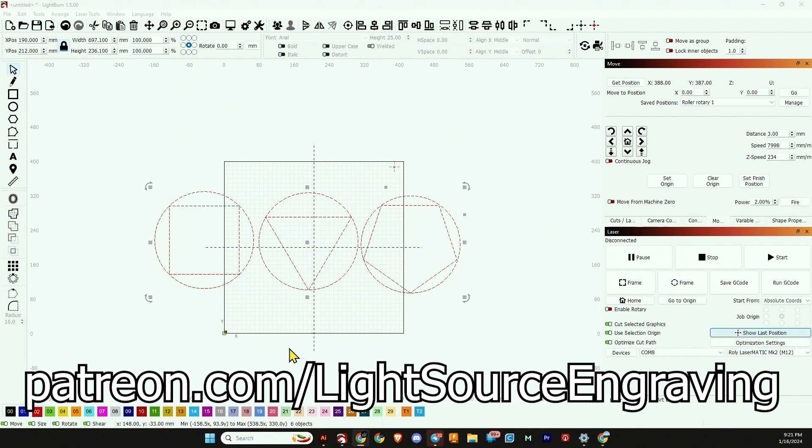So here I have examples of 3 objects, and then I have circles around them. So you can see this is how the objects are described as circular, that the points around them form a circle.

So if you have an object similar to these shapes, then you can use the circle center finder tool - that's a mouthful - to find the center of your object.

What you're going to do is control your laser head from either the control panel on a Ruida controller or with a diode like I have here. We're going to be using the move tab to jog the laser head around.

Another thing we'll be doing is changing the distance. So if it was 3 millimeters and we have a 100 millimeter circle, we're going to have to click that button 33 times to get through that 100 millimeter circle. So if we change it to 10, then we only have to click it 10 times. So that's what we're going to do, we're going to adjust that distance.

And speed, I'm just going to leave it the same, but I'll be adjusting the distance. Then once we get close to the edge, we want to drop that distance back down so we have precision to line it up with the exact edge of our object.

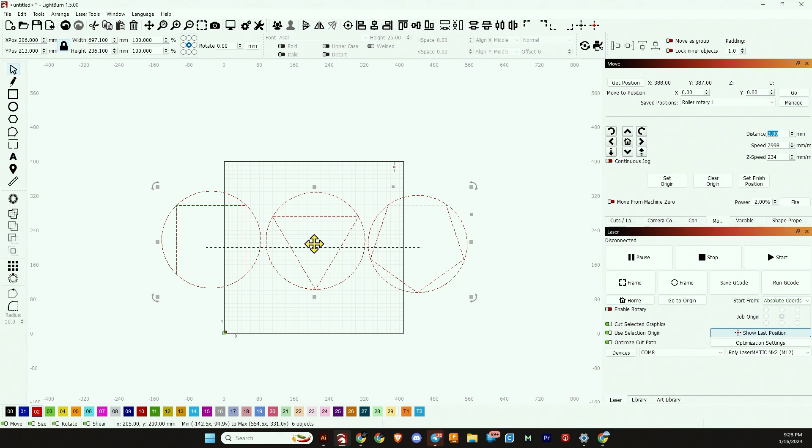And I have these objects cut out, and I'll show you how to find the center of them on the diode.

The first thing we have to do is turn it on. The second thing we have to do is home the machine. Now mine is on and it just homed itself, but I'll do it again.

All right, so now we are home and we're going to go ahead and fire the laser, and then we're going to use these move tabs. I'm going to change it to 10. Then I'm just going to start jogging it to the outside position on this circle.

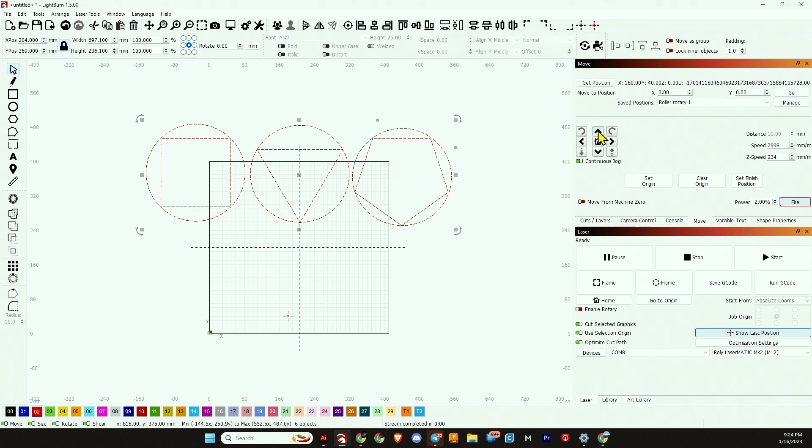And if you want to have it move continuously without having to click the buttons, you can turn on continuous jog. I'll show you what that does - you hold the arrow down, and what that does is allows your laser to continuously move without you having to click the buttons. That can get you from point to point a little bit quicker.

Then when you want to line it up for accuracy, you want to turn that continuous jog off. So now I'm going to set it to 1 millimeter, and what I'm doing is just moving the laser head 1 millimeter at a time, and you can see that I'm just on the side with that beam.

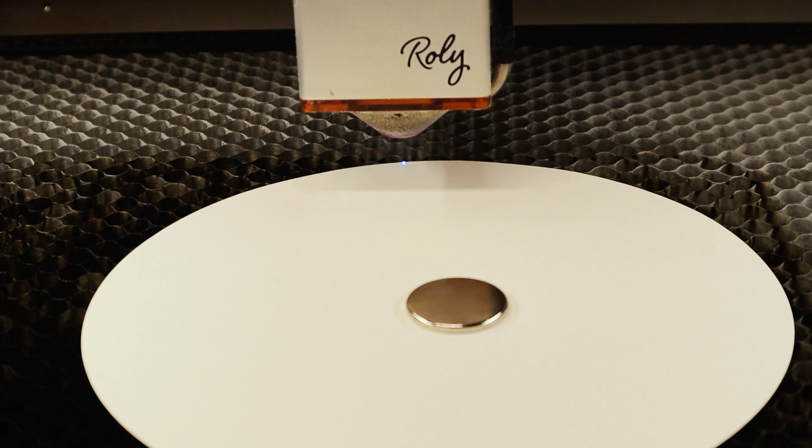So we're going to go back to our center finder tool and start it up. So laser tools - it's over here, it's in the laser tools menu. For some reason it brought it off onto my other screen.

All right, so now that we've jogged it to our first point, we're going to go ahead and click set first circle point. And it's telling you right here is where our first one is. So you want to spread your points out as much as possible - move it into this vicinity somewhere, and then the third one will move into the vicinity over here.

So let's go ahead and set the second one. I'm going to turn on continuous jog and just move it to the center like that, and then over to the side. You'll see how over at the edge you really got to turn that down - turn continuous jog off, it's set at 1 millimeter.

And depending on your laser pointer, your red dot or your diode, you could even try to split the dot in half on the side of your material to try to get it as accurate as possible. So we're going to set that as the second point.

And then I'm going to go continuous jog on, I'm going to go over to this side, and now we'll set the third and final point.

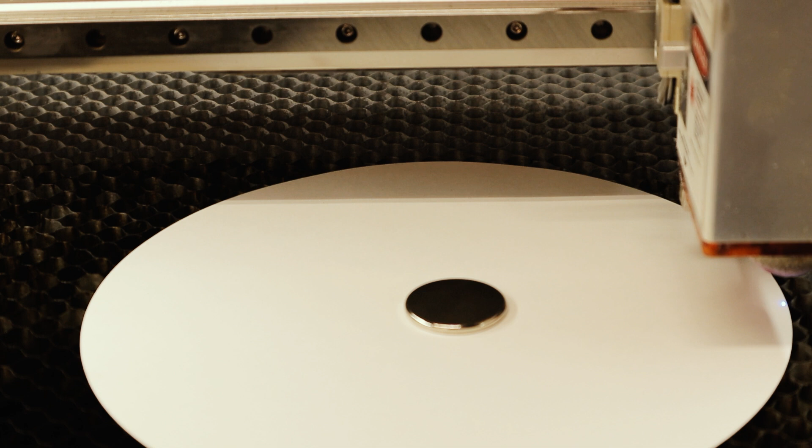And then there's our third point. So click set third circle point. Let me bring it back over to LightBurn here. And when we click it, it gives us the option to jog to the center and add a guide to the project. So I'm going to add the guide, and jog to the center so we can see exactly where this laser head ends up. And there we are, right in the center of the circle that I have down.

I'm just holding that down with a magnet so the laser doesn't blow that piece of paper away. Then when we come back to LightBurn and hit the OK button, right here you'll see our template for that circle. And right there it's showing us where the laser head position is, which is exactly in the center of our circle.

Now, if you want to work in absolute coordinates, you can most certainly do that and move your artwork right here to the center. Or you could even set the origin of your work at this point and then use the user origin option. So you have either of those options available to you.

Now I'm going to run through the same process and show you that it does work on a triangle. Let's do the triangle next. So I'm going to just delete this because we don't need it. We're going to be using a different object.

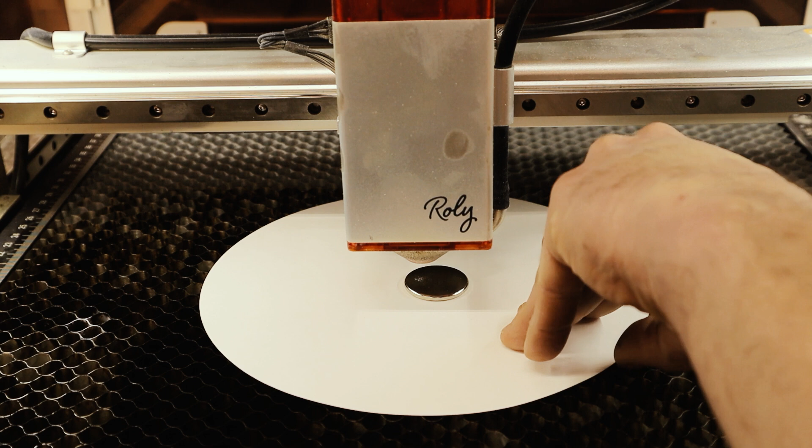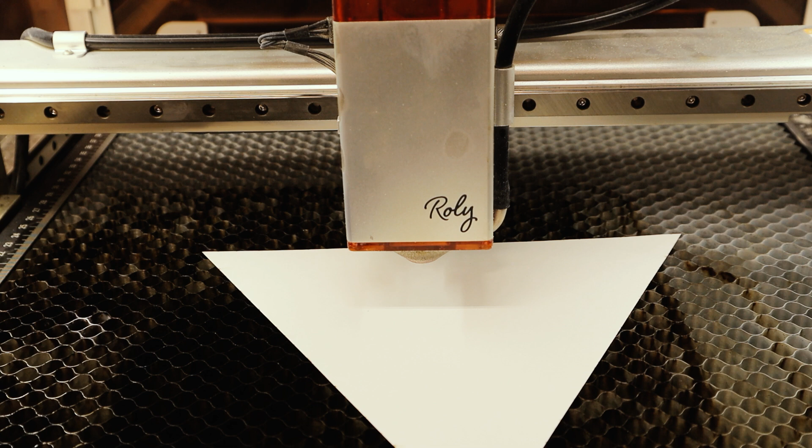I don't think the laser's going to move that around too much. The air off the fan doesn't seem too bad. So I put that in a different position, closer to the front of the laser bed.

And if you have an object that has points on it, like a hexagon, pentagon, or a triangle, you want to line your laser up with those points. So let's go ahead and jog to our first point. All right, we have the triangle, and I'm just going to jog to the first tip, which will be our first point. I have continuous jog turned off, obviously.

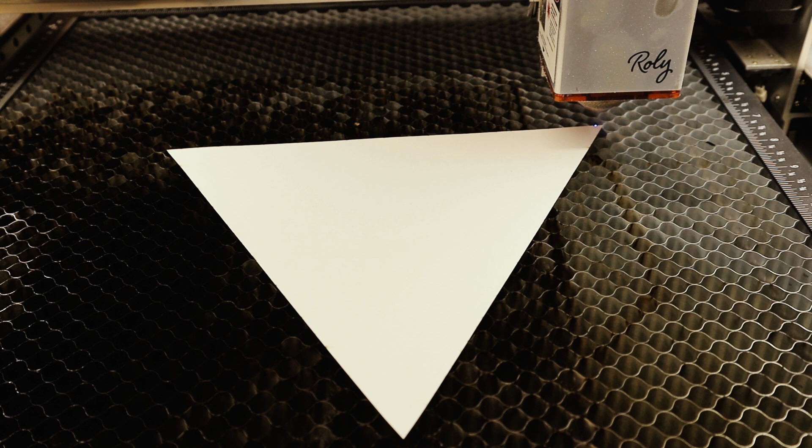And we're close. So there we are at the very tip of that triangle. Now we want to go back and get to the same position on the other two tips.

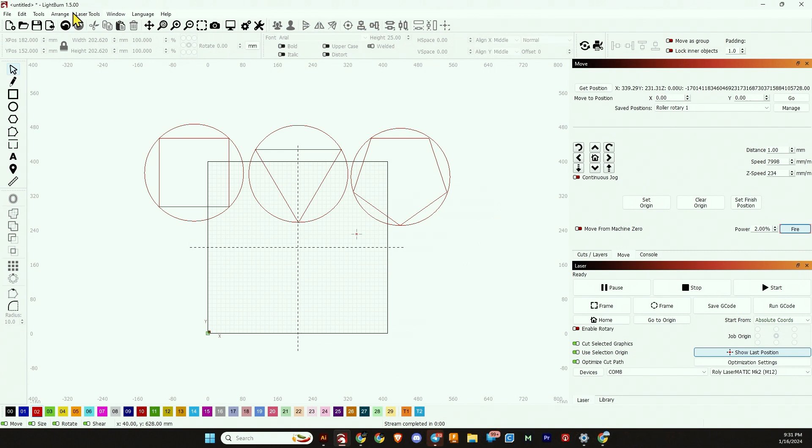But first, we need to go to Laser Tools, Center Finder, set our first circle point, then we jog, continuous jog. And this one, we're just jogging all the way across. I'm going to turn off continuous jog, leave it set at 1 millimeter, and start moving it until we get it close. There, now we're on the paper. Now we're close.

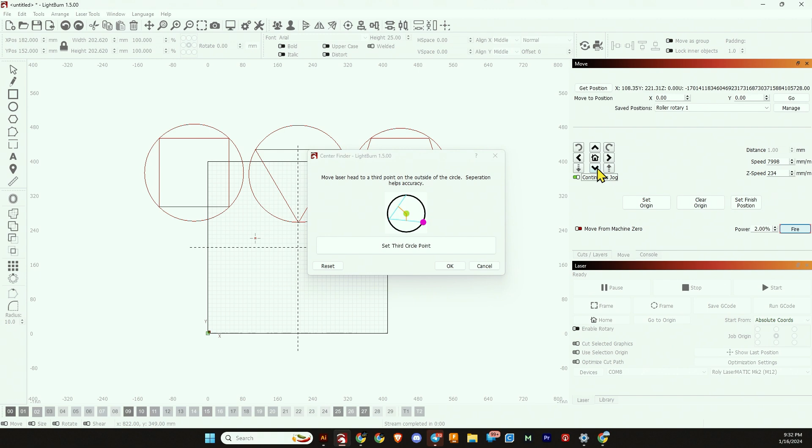And that needs to go back. 1, 2. All right, and there it is again, just barely off the edge of that piece of paper. We'll set our second circle point in LightBurn. So let's click set second point, turn on continuous jog, and just repeat the process.

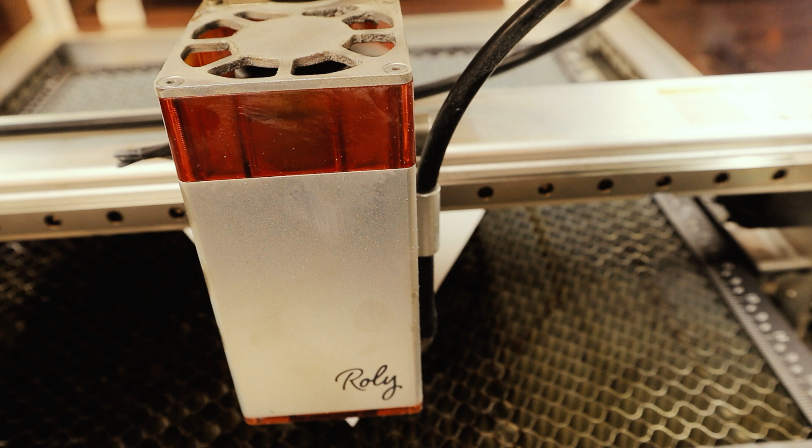All right, now let's turn off continuous jog and get it lined up. And there we are on the very tip of the triangle. So we are on the tip of that triangle. I'm going to click set third circle point. And now I'm going to click jog to the circle center and then add the circle guide.

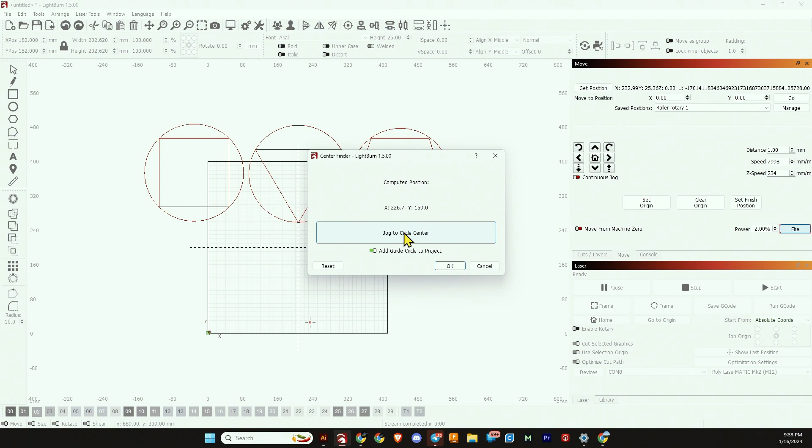So now we've jogged to the center and we have our circle guide within LightBurn. Now what I'm going to do is do a rubber band frame of that circle guide that it just gave us, so we can make sure that it runs over the 3 tips of that triangle. And it is indeed running over all 3 tips. So LightBurn did its job, and it did indeed find the center of a triangle.

And then basically you just repeat that same process with any other shapes you have, but that in a nutshell is the center finder tool. Just remember that the more accurate your placement is on the very points or edge of your circle, the more accurate finding the center is going to be.

And with diode, you have to use the move tab, and with the DSP, you can use the move tab or the controller, the arrows on the controller. If you end up setting a point incorrectly, you have to hit the reset button, and it'll reset all the points, and you start over from the very beginning.

If you set your points too close together, like point, point, point, those first 2 points, if you try to set them that close, LightBurn could give you an error saying you're trying to set your points too close together. I think it says not enough space between points. So at that point, move your second point further apart, or your third one further apart. Whichever one you're working on, just make it further away from the previous, and that should fix that error. Another error you could see is unable to query the current position of the laser.